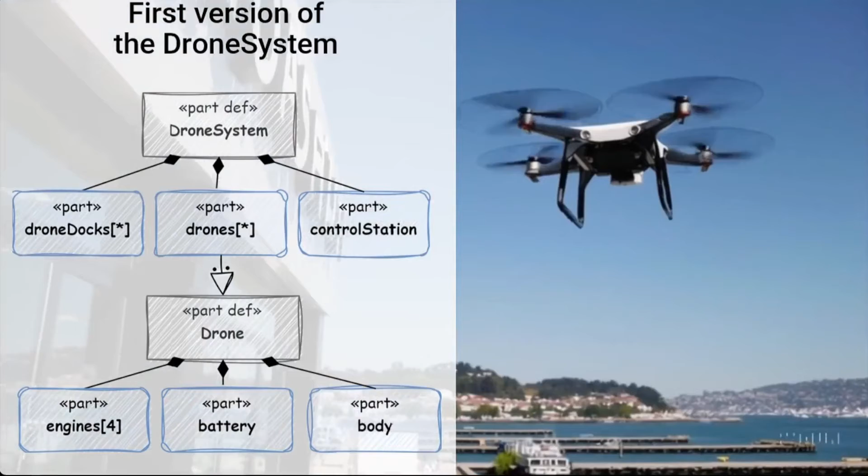Well, in real projects, as Charlie said, we typically build a family of systems. And our initial idea of a single delivery drone was quickly turned into a family of systems by our customers with new requirements. They would like to see different types of drones with different numbers of engines and with different attachments for small payloads and large payloads and all this stuff.

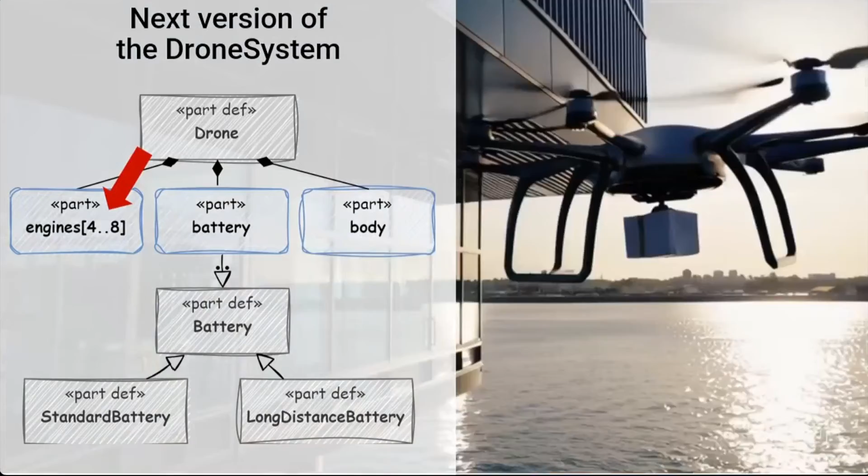So our architect creates a new architecture, a revised version. I skipped the payload attachment on this slide for now. This model now allows different kinds of batteries and a different number of engines. So we have variability here, but we have not used any specific variability model elements yet. Typical elements to model variability are multiplicities. So this model allows 4, 5, 6, 7, 8 engines. And we have here the specialization relationship to model 2 different kinds of batteries.

However, this model leads to several open questions. Assume we hand over this model to production; they will for sure have some questions. For example, I don't think that a drone with 7 engines will work well. So how many engines should we build in the drone? We said 4 to 8. Or this one: which kind of battery should we use? We have 4 different kinds in stock.

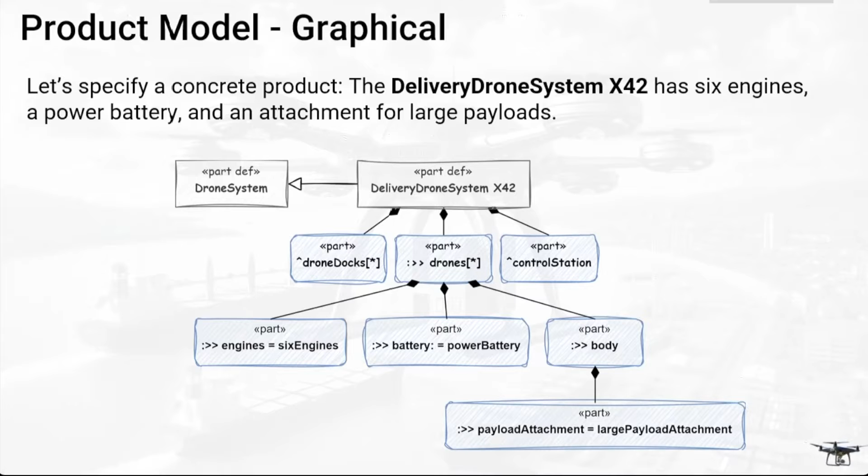And of course, my presentation is not over yet. We must not forget that there is more than SysML in the engineering world. I know that's hard, but there are other things. As for example, requirements are often not modeled with SysML, simply stored in text documents that are still out there, or in a requirements management tool. Or software; as Doug Rosenberg says, there's no system without software. Source code is a crucial part of a system, and it's not specified in SysML in most cases, or mechanical design, and so forth.

And all these artifacts are also impacted by the variability. So if we decide for 4, 6, or 8 engines and all the other stuff, it has an impact also on these artifacts. So how does this fit together, the modeling in SysML v2 of the variation and variants with all the other engineering artifacts?

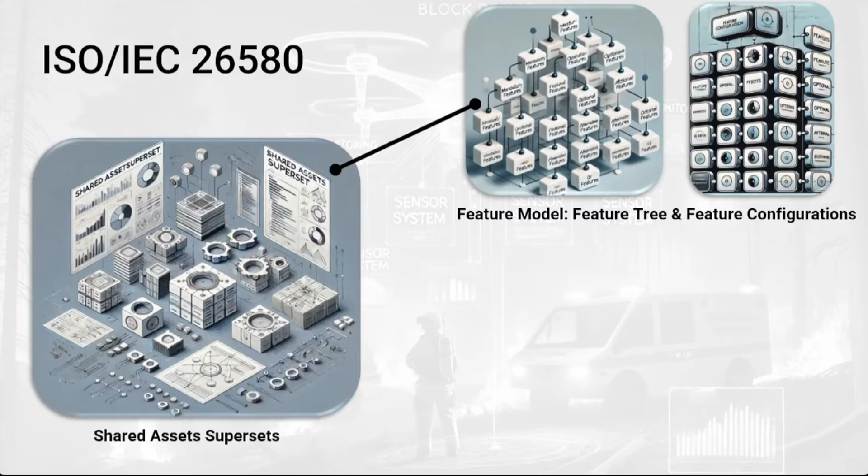And then that's the idea. Theoretically, it's great. There's some magic PLE configurator that gets a feature configuration, selects the corresponding parts in the shared assets, and automatically creates a product model. So I think you see it on the slide. Our drone architecture is in the shared assets superset, and this delivery drone X42 that I showed you before is one concrete product model. And we have not modeled a feature tree yet.

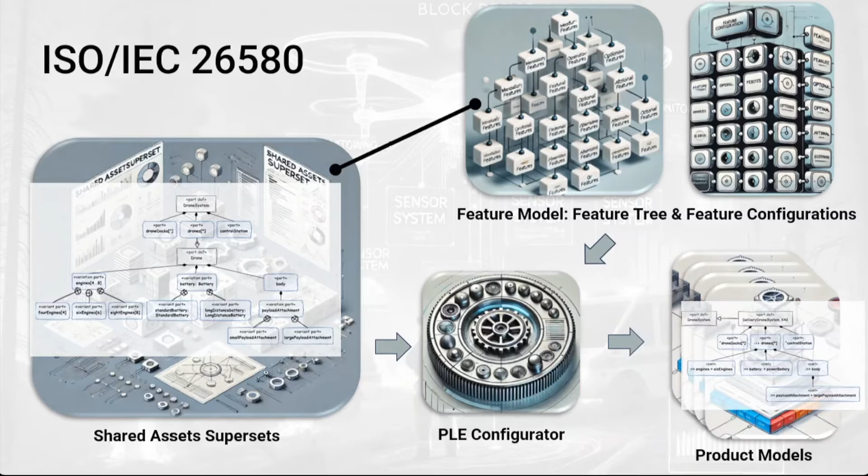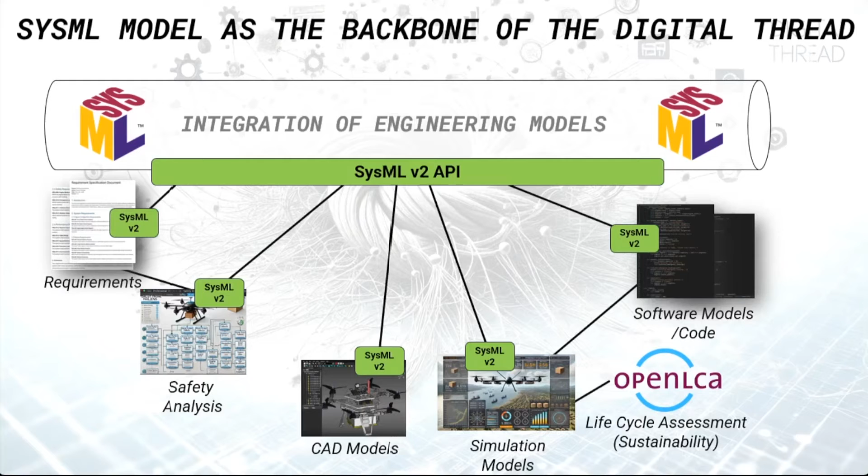So how does this fit together? Let's go back to this picture. With our SysML model, which is in the shared asset supersets, plays this integrated role of all our engineering artifacts. But now, in addition, we have this feature tree thing. A feature tree defines the variability of my product line and has an impact in all the engineering tools. I need this information in my CAD model. I need this information in the requirement model. I need this information everywhere. And my SysML model, of course.

So here we have another central element there, the PLE tool. And there lives the feature tree and the feature configuration. So now my CAD tool and the other engineering tools must connect to the SysML tool for this integrative thing, and connect to the PLE tool to get this variability information. And all these tools also need some kind of PLE plugin to use this variability information to automatically filter out unwanted features and so forth.

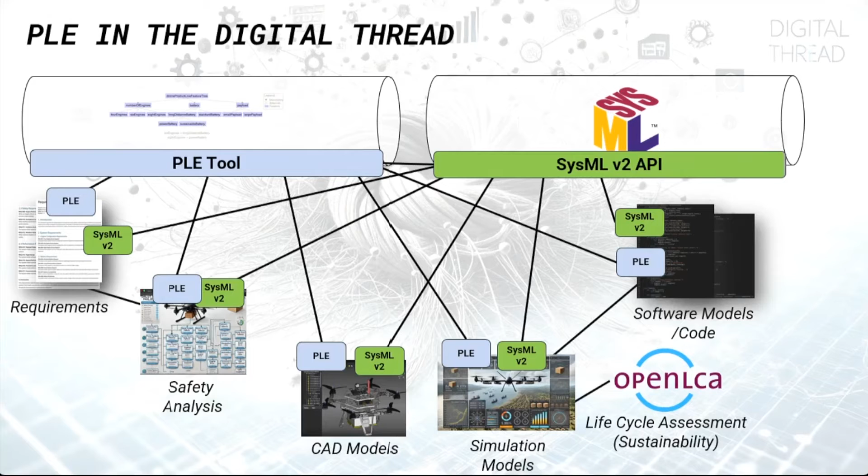And very likely, these two worlds have two different connection technologies. We have the API and SysML v2, and we have typically some tool vendor proprietary technology on the left side here. So now imagine we integrate the feature model in SysML v2. That would simplify the digital thread. So now the connection technology is SysML v2 API, but of course we still need PLE functionality in the SysML world at the top, and we need PLE functionality still in our engineering tools.

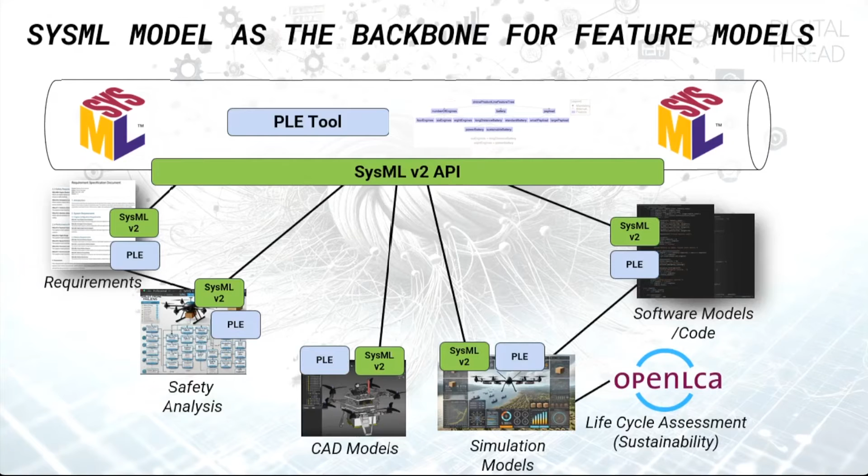So how do we get the features into the SysML world? Well, I had explained it before. We can define a language extension and define the feature concept and then use it in the language. So a disclaimer up front, the following is not final. We are still in the laboratory doing experiments. It's just a proposal. And in this laboratory, you will find, beside others, this guy here, Marco Forlingieri. I mentioned him before. He's one of the co-authors of this book and the INCOSE PLE working group lead.

So he's responsible for the PLE stuff and says, oh, in PLE, you typically do it that way. I'm also in the lab and do the SysML v2 stuff. And another one is in the lab, that's Vince. And he takes care that everything is formally correct. So that's typically our roles in the laboratory. So I have an idea. Marco says, no, no, no, in PLE you do this differently, okay, change it. And Vincent says, no, that's not formally correct. And what I show you next is our current version. We had some versions before, and there will probably be other versions in the future. So we use the SysML v2 language extension to define features in SysML v2.

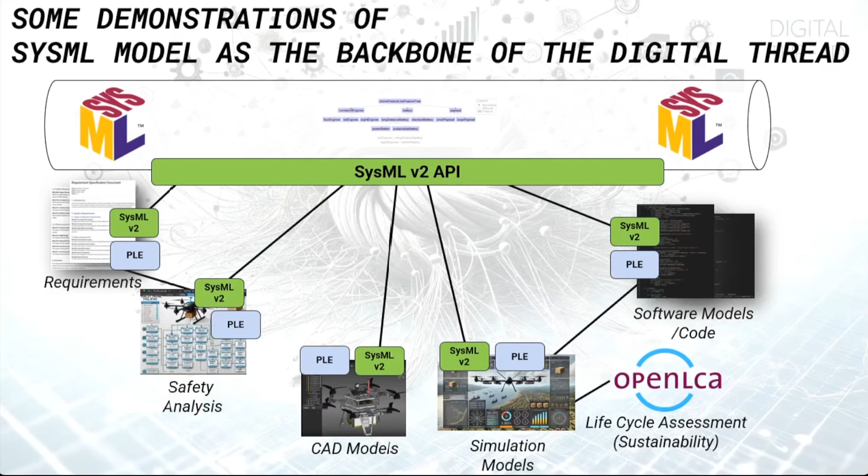So, yeah, finally, oh, I'm good on time. I can show you some brief demos how to use now this model in the SysML v2 world, how you can use this model and the API. And I will not do live demos because, well, they typically fail. So it's just screen cuts, but it's real. So there's no AI tweak in there, except that I shortened it a bit. The performance is too low, so I increased the speed a bit.

And last one, well, this is a PLE tool. It's not a commercial one. It's FeatureIDE. It's an open source PLE tool. It's Eclipse-based. So I wrote a plugin for that one, and it can access the API. Now it's empty. I can access the API and say, load the features from the SysML model, and then I get the feature tree in the tool, and it's there.

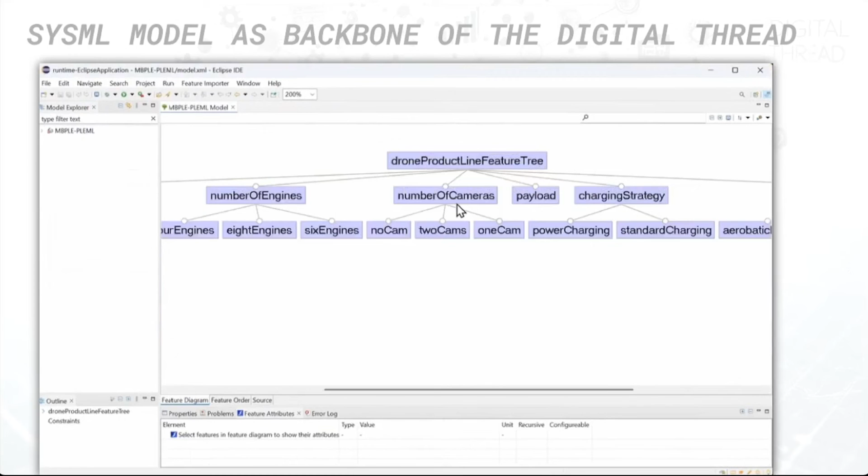Of course, it's also possible the other way around. I can change now the features here and write this back to the SysML v2 model. So as a feature modeler, I still use my favorite feature modeling tool, if it's this one. I create my feature trees with all the stuff, but in the background, the information is written into the SysML world.

Yeah, these are only short demonstrators. It's not a product. Actually, I wrote these 3 plugins in 4 hours together with my friend ChatGPT. So I'm not a programmer anymore, not a good one at least. I had this idea. I went running, had this idea that, oh, I must do this, came back, and 4 hours later, this was ready. It's quite easy to do that.